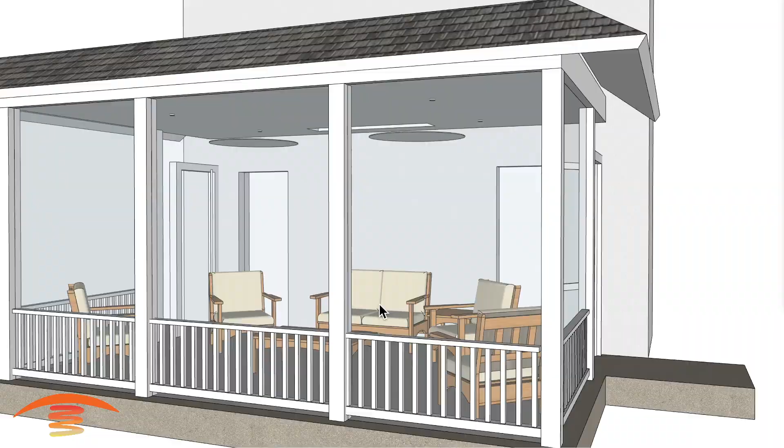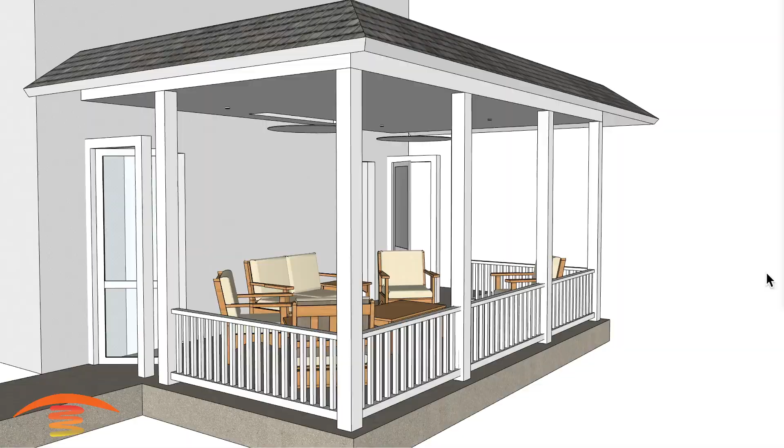All right, so we had a viewer ask a question in reference to flush mounting a unit over here and what the outcome would be for, I think, basically the sitting position right here. There are vinyl windows on the outer edge of this structural patio, and also screened sections as well. I didn't put all of that detail in. In fact, I'm going to take out the vinyl windows here. I'm just going to remove that so we can maneuver through the patio here a little bit easier.

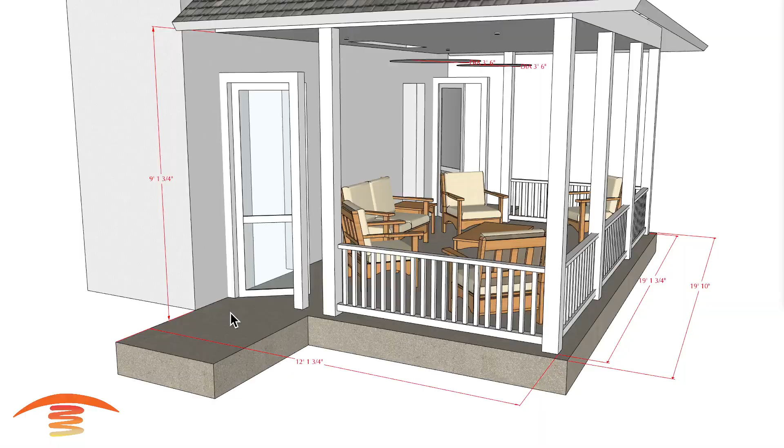First of all, let's go into the dimensions that I have. So dimensions are not 100% accurate here, but they're very close. I would say 19 foot 1.75 inch that I have there, and then from the wall over here to the outer edge here, I have that at 12 foot 1 3/4. I have a ceiling height of roughly about 9 feet off the finished floor.

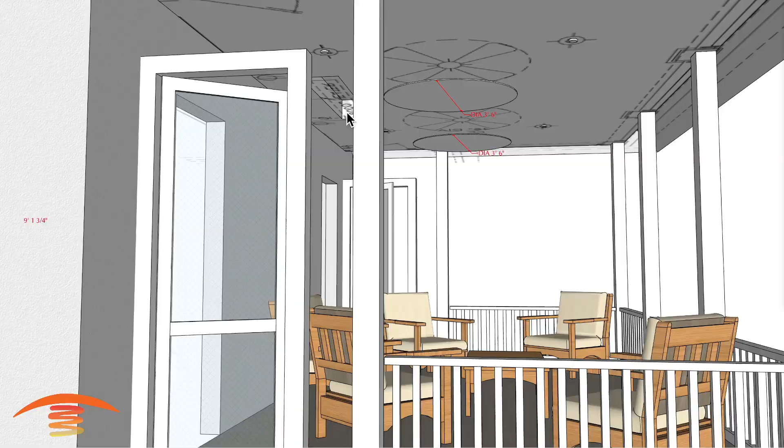There are 2 fans, and I've located those fans based on the ceiling drawing that I received, just so you can see that. I placed the light structures here as well as where they're asking about the flush mounted unit as well. And there's a different question too in reference to a wall mounted unit here and how that would affect the seating position over here. Let's see if there's anything else. Oh, the fan dimensions I have is 3 feet 6 inches, or 42 inches.

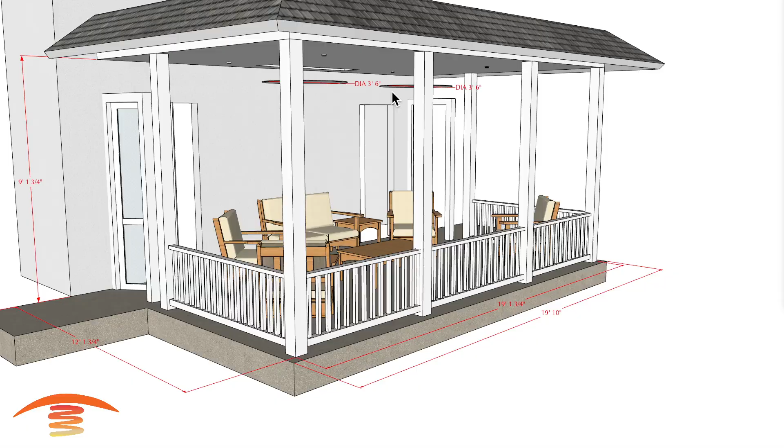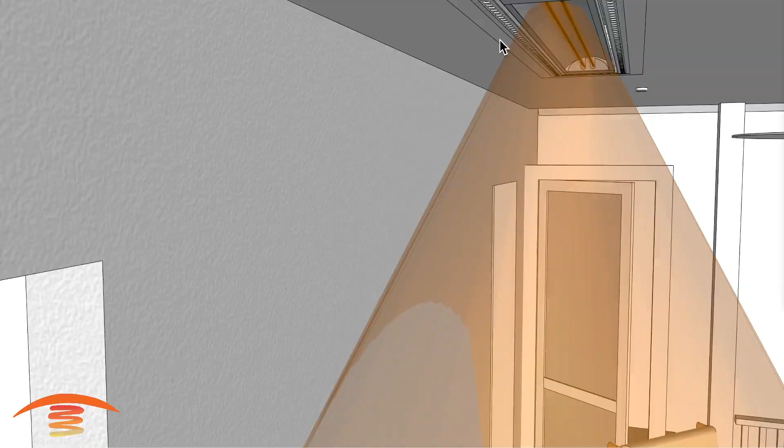Let's go ahead and shut that off and look first of all at the flush mount unit. So I'm going to put that on. So this is a 6,000 watt flush mounted unit, and we want to make sure that we are meeting the clearances to anything below the heater itself. So here's the clearance, 18 inches from the edge of the heater. So this is the heater itself right here. This is the flush mount kit. The edge of the heater, 18 inches to the edge.

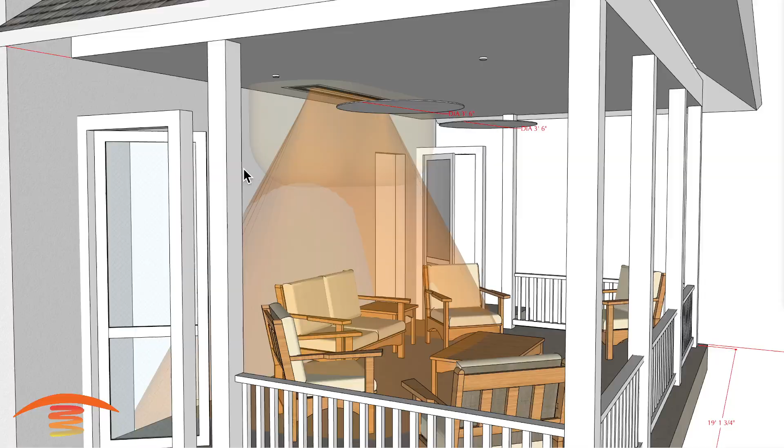Now I put this as a stucco wall. I'm not 100% certain, but just in case you're thinking, well, stucco isn't combustible. Well, the structural part of the wall behind the stucco is still considered combustible if it's a wooden structure. So even though some people think that stucco is not combustible, it is in fact combustible. So you need to make sure that you are meeting those clearances. I put that off here. Let's see. There we go.

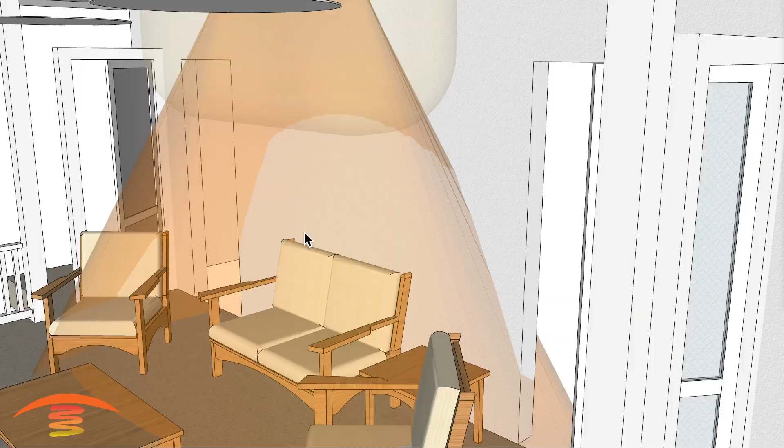So anyways, this is a 6,000 watt unit, and the intensity for this position here is very good at 9 feet off the finished floor. And I would definitely want to have a control system for something like this, because there's 3 ways that you can turn this heater on and off. Number 1 would be a simple switch to turn it on and off.

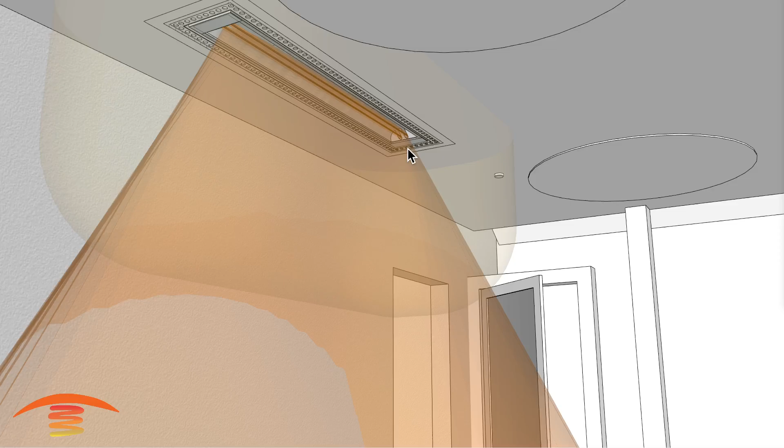The second one would be what they call a duplex switch, which would allow you to turn one element on, one element off. And then the third would be to use a control panel, and that would allow for dimming the system so that you could actually turn it from 10% on all the way to 100% on, depending on how you want that heat at that particular moment.

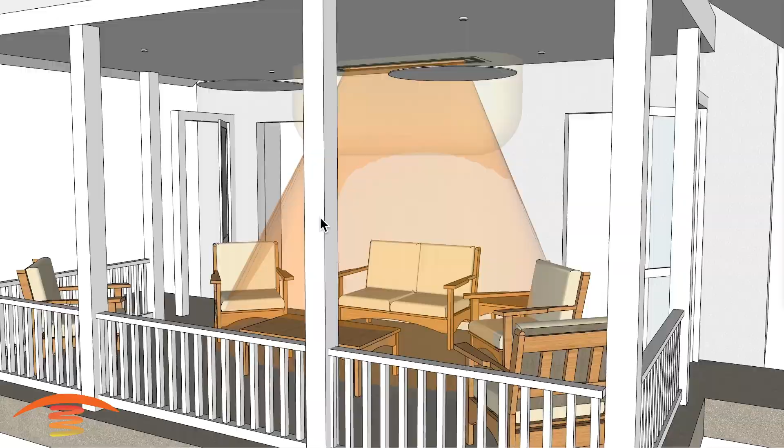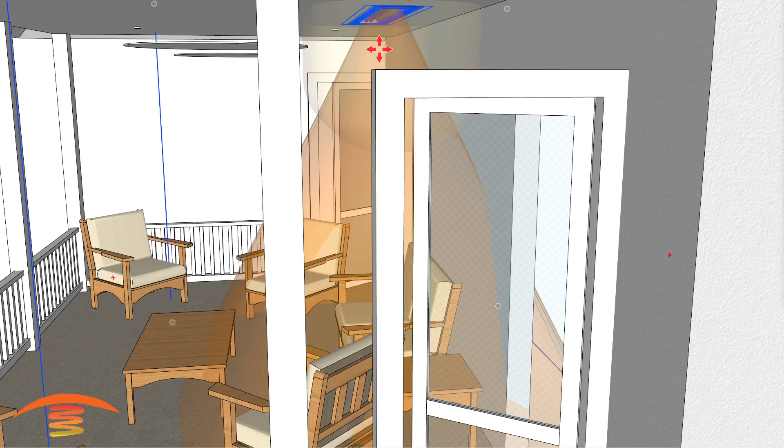The other thing I was going to mention is you can see how the ray here is penetrating the wall fairly abruptly, and a lot of the ray is being penetrated in here. It would be a little bit nicer to be able to move the heater over to the outer edge of the patio. So if we were to move it, let's say, maybe 24 inches out, obviously we have an issue now with the fan dimensions here, but could we move those fans to eliminate some of that issue?

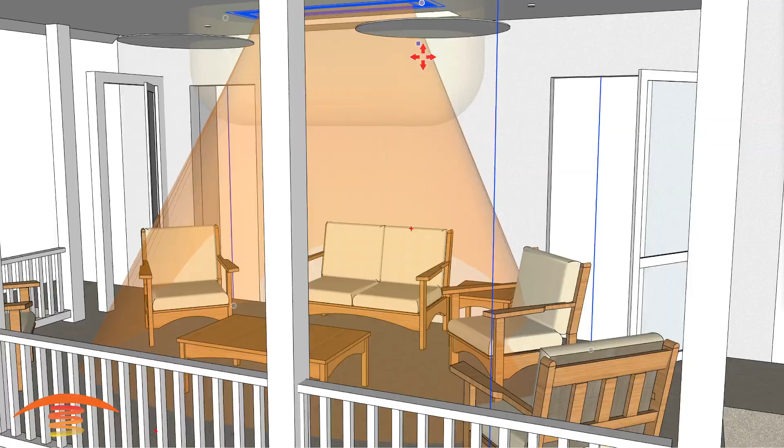What I have here is, I believe, and I'm not 100% sure, of the drawing. I'm going to put on some of the elevations that I received here so you can see. I've matched this up fairly decently. And so I think that the fans could be pressed out and the lights could be pushed out to the left a little bit in order to achieve some of that.

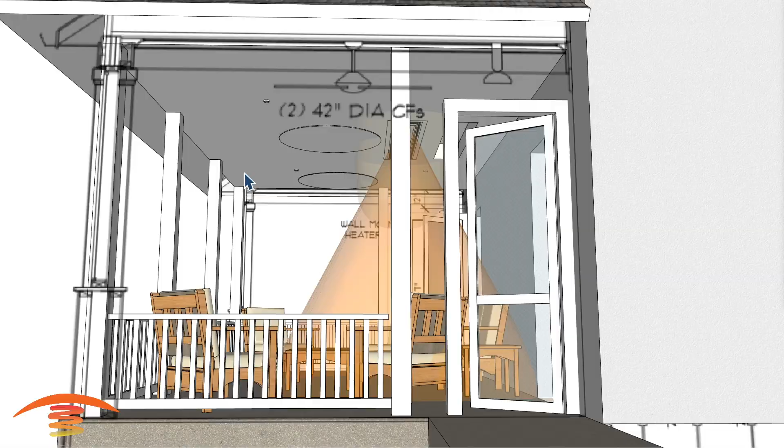So let's go ahead and just move the fans here. I'm going to move them roughly 12 inches out and see what happens here. So that's 12 inches out, and visually it still looks like it's partially centered within that span. And I'm going to go ahead and turn off the elevations here that I received so we can maneuver things a little bit easier. So that's 12 inches out.

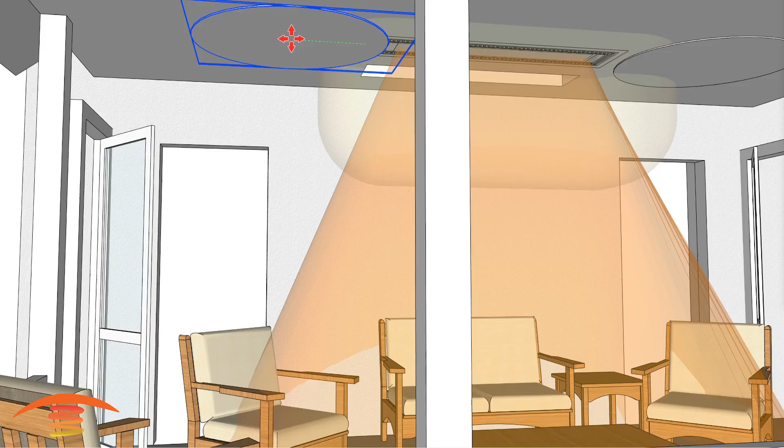And then if I was to move each fan over to the left and right, how far could I actually achieve that? So that is 1 foot 4 inches. So we'll go 16 inches over here, and let's see if we're even outside of that. Yeah, that clearance area is good now, and so we'll move this one over here at that same distance, 16 inches to the right.

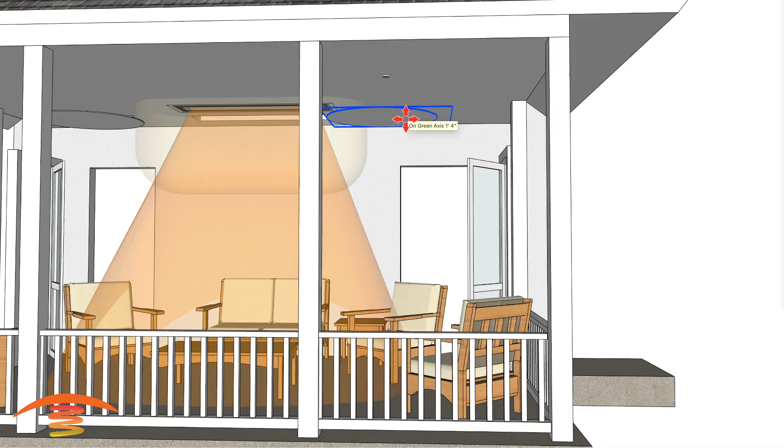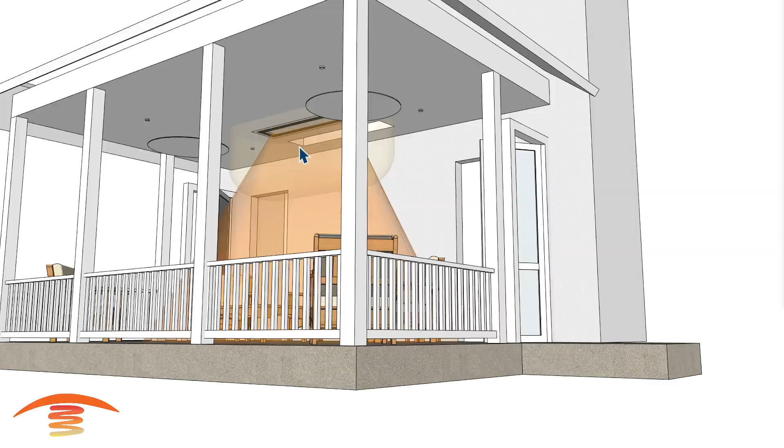And there is another thing that we need to kind of be concerned about, and that is the doorways here. Is that going to affect hitting the fan, or is that going to affect hitting the clearance area? But as you can see here, we're fine with that. That would be something I would consider, and obviously we'd want to move the light fixtures as well out to the left. But that, in my opinion, would be fairly decent if that could be done.

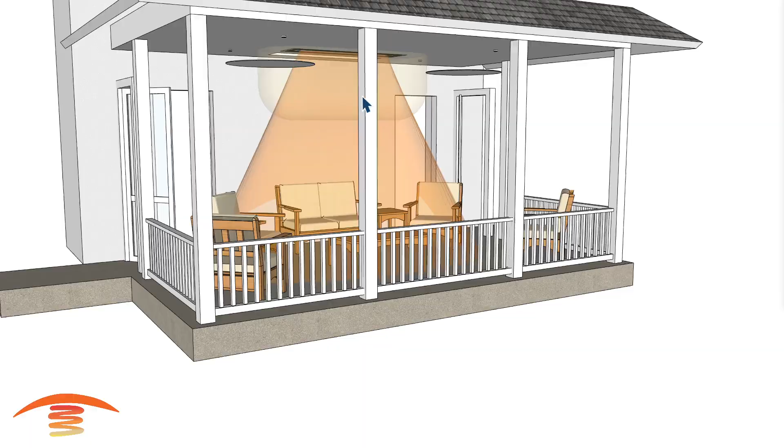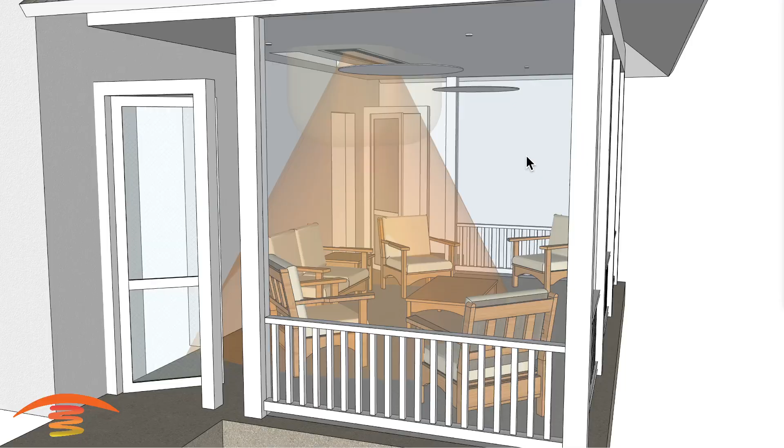Another thing I should mention too is the fact that with the vinyl siding and the screened in sections that I don't have on here, the air movement is really reduced with those elements. So cold air blowing through a patio structure isn't going to be that effective with a protected patio like this. So the intensity doesn't need to be as high because it's more of an

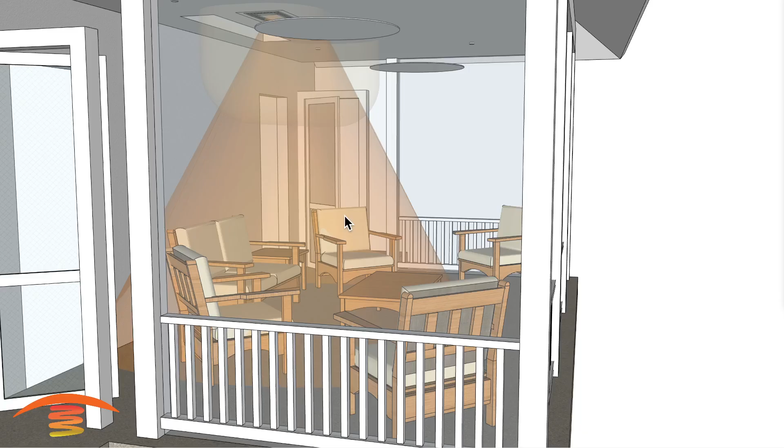enclosed space, and with enclosed spaces what happens is the heat ray itself, this is infrared light waves, penetrates all mass: the floor, tables, chairs, your human body, and those masses will then produce a convection type of heat into the area, and that convection heat, meaning that you're heating the air eventually, will stay in a protected area. So the intensity isn't as dramatic or highly required for an enclosed space.

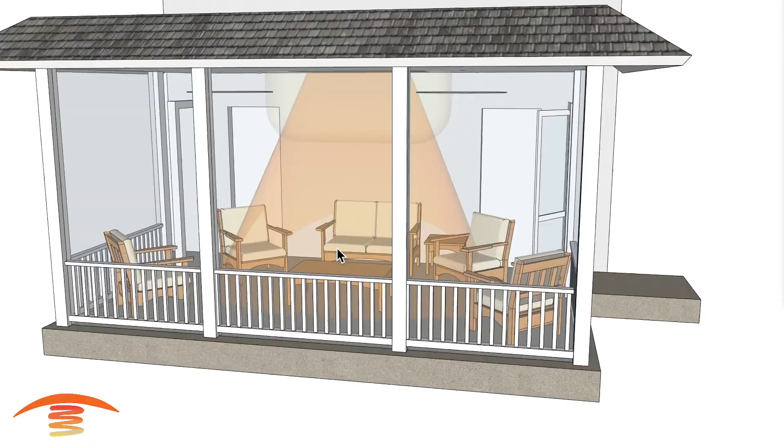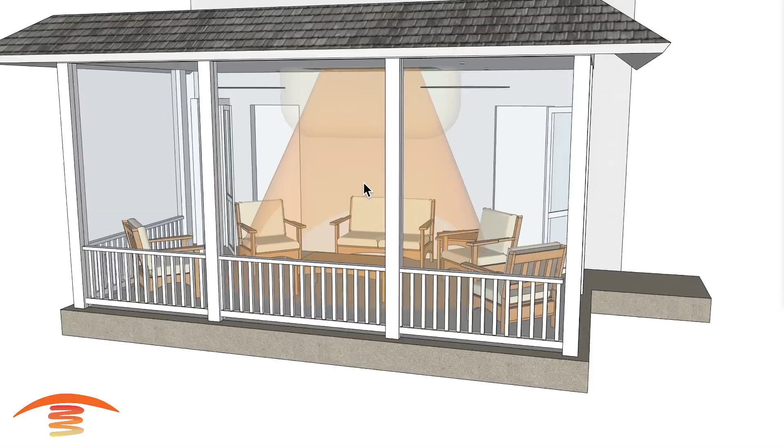Although, indoors here, it is obviously going to be just as cold as the air outside until you put the heater on and 15, 20 minutes, an hour goes by. That intensity or air temperature inside of an enclosed space will build up. So just to note that the intensity isn't as critical as if it was an open space like this where the air movement is constantly going through.

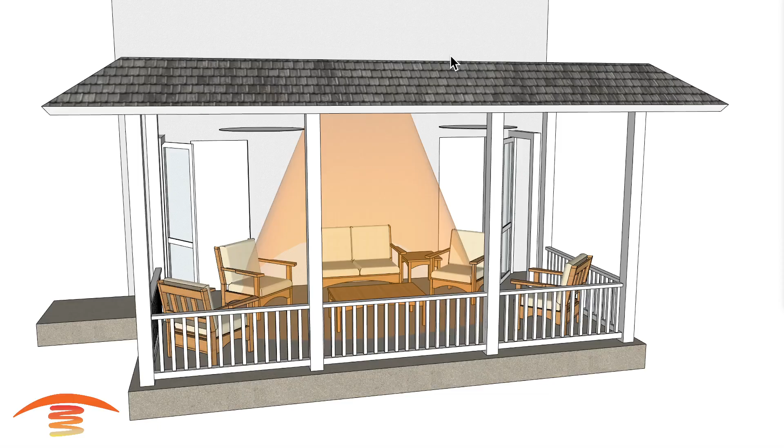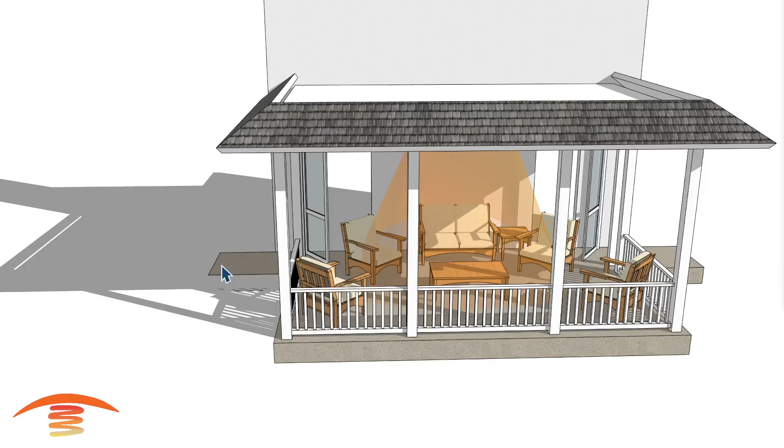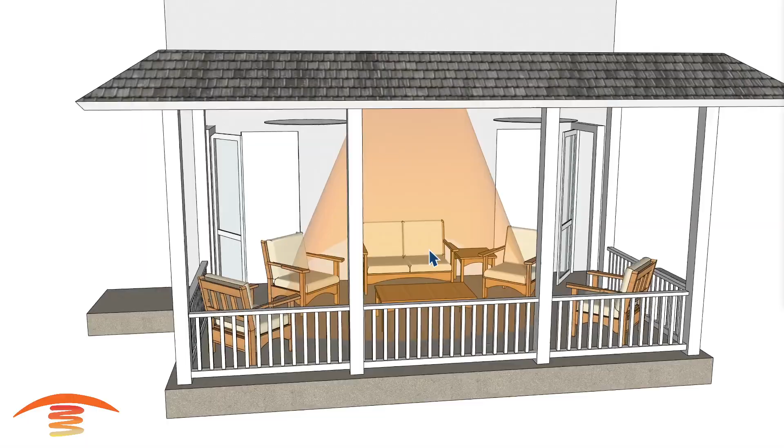If you're in that light wave itself, then you will feel the warmth of the heater and feel warmer than you do without that heater on, just like being in the sunlight. Let's see if there's anything else I wanted to bring up.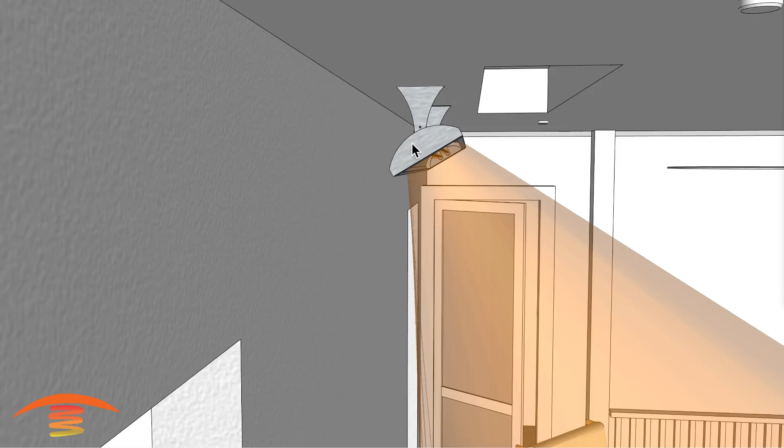Let's go ahead and turn that off and then look at the other question that they had, which was a wall mounted unit on the wall back here. So this is a CD 6024, a 6000 watt 240 volt. Now you might notice that I've attached this to the ceiling, not to the wall. And I'm going to actually just bring this back so we don't see this at this moment.

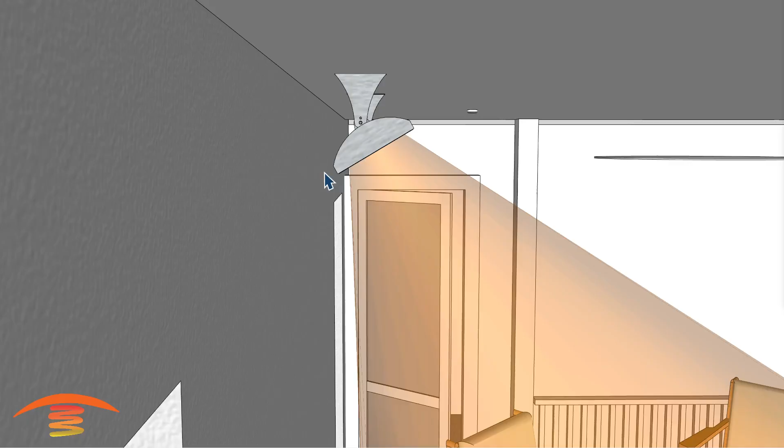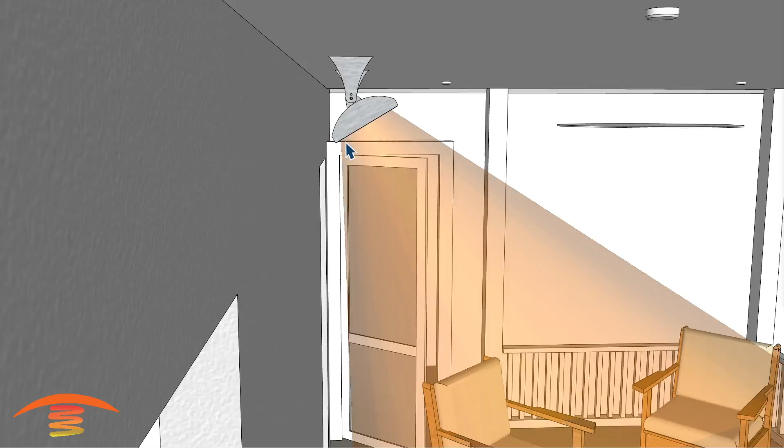But I made sure that we are 6 inches away from the edge of the wall here, and that we are only at a 30-degree tilt, so straight down 30 degrees out. The reason why is because if you put it on a vertical surface or wall, something of that nature, and you have it at 30 degrees, you must lower the unit an additional 6 inches. But with a ceiling wall mounted unit, you're allowed to place it at 30 degrees, mounted on the ceiling.

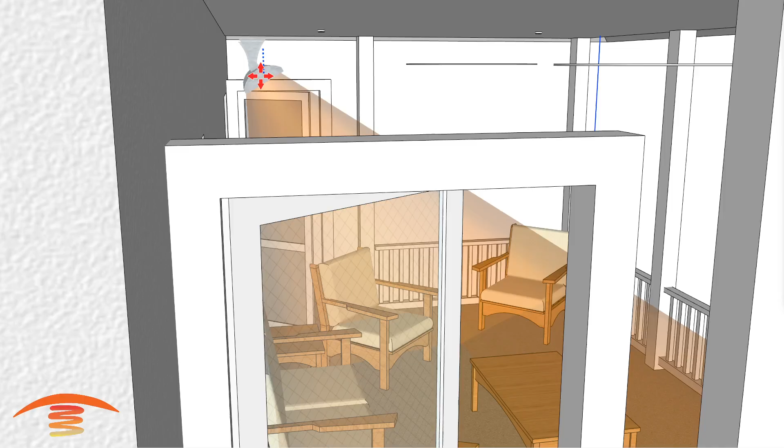You know, it's going to be essentially in the same area, or visually looking like it's in the same area, but obviously if you mount it on the wall, that's going to be an additional 6 inches down. So this is kind of what I would prefer if you're going to do something like this, is to place it on the ceiling 30 degrees out. And yeah, I think this would be much nicer.

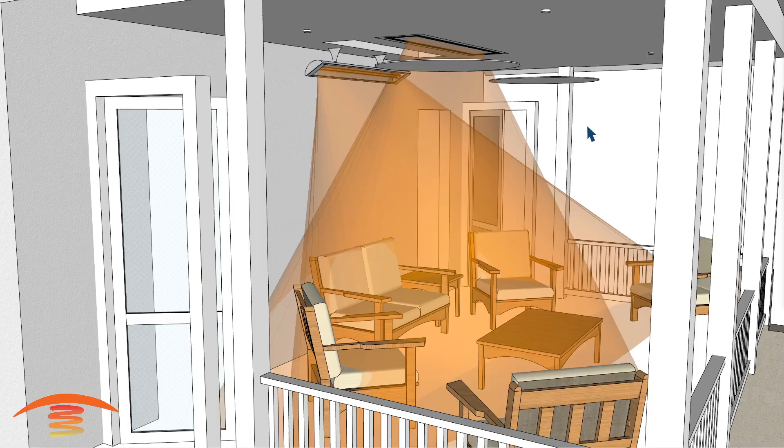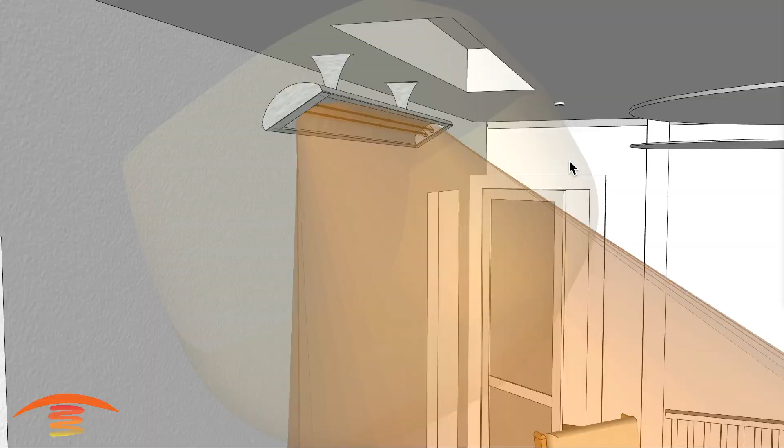Now let's see if I can go back here real quick. I'm going to do a lot of reverse stuff here so that we can get these heaters back into the location. I'm going to turn this one off here so we don't look at all that flashing. But let's see if we have that back right. Yeah, I think we do. And let me go ahead and turn that one back on now so we can get a better idea of the clearances here, which are fine with that ceiling mount like this. And yeah, I think this would be decent as well.

It would definitely heat up this space right here, give you a little bit more areas of coverage on the left and right. It would not reach out here or out here. So what would I do in order to make that a little bit more coverage, is I'd place maybe a couple other units over here. This is a 5200 watt unit here. It's only 48 inches long, the heater itself.

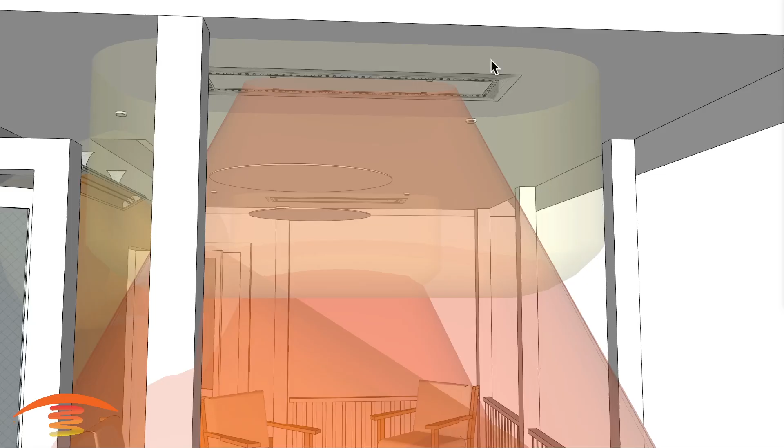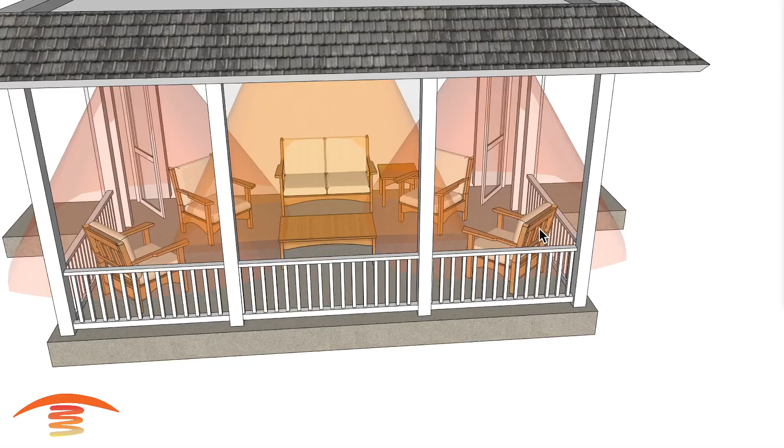Now I didn't do the recessing of the heater, or ceiling I should say. And let's turn off that clearance below here. But you can see now that we are heating up the entire space as far as the area that's going to be occupied. So that's just another thought that I wanted to bring up.

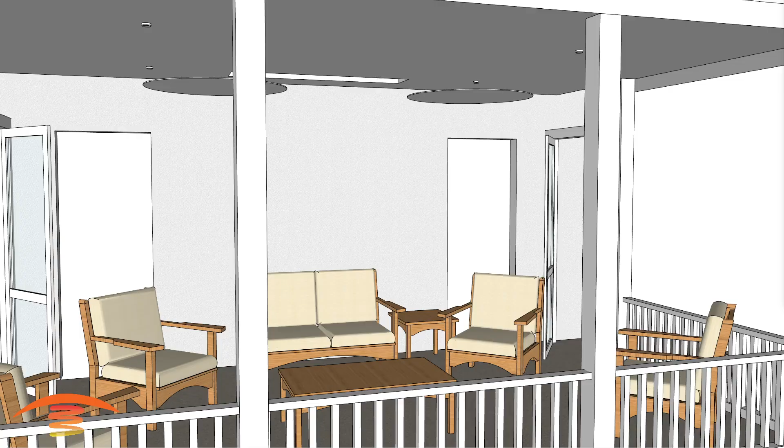And then one last thing I'm going to go through. This is going to be a little bit of extra time here, but putting a recessed heater in here, let's turn this one off and go back to the flush mounted unit, and I'm going to move this back here. I think we had it 24 inches, yeah. And I'm going to actually take off the ceiling for a minute.

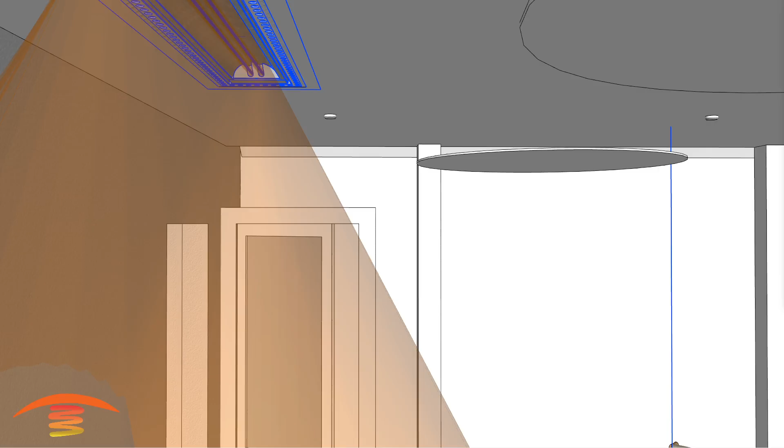And sorry for the delay here. Oh, here we go. Sorry about that.

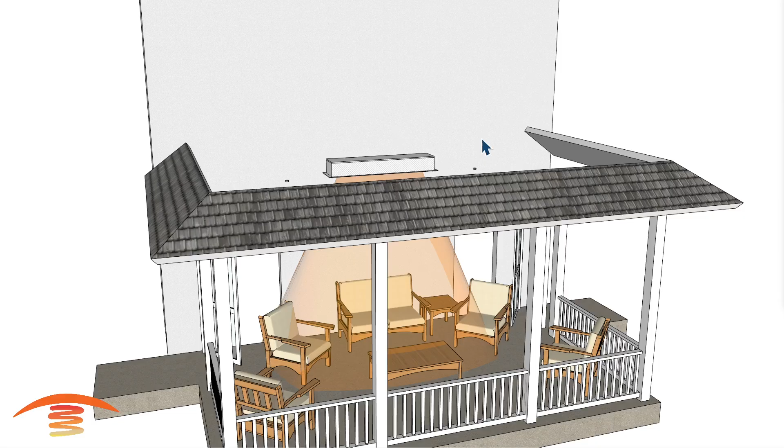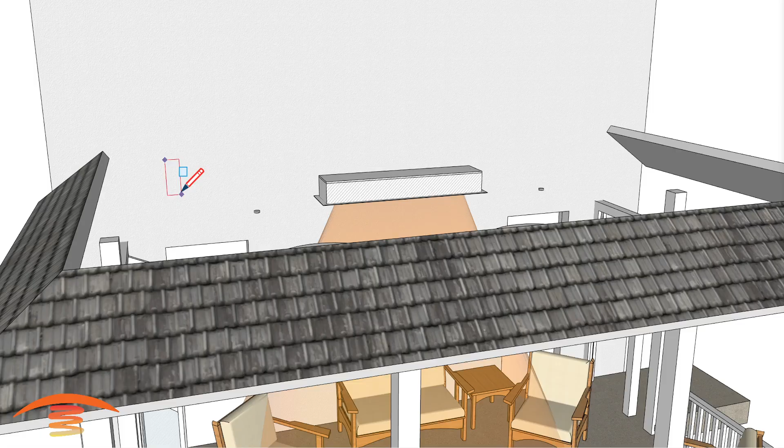So generally, when I look at drawings for this top section here, it's an patio structure up above the patio area below, so a balcony deck type of structure. And generally what I see, and I don't know if this is going to be the true case, is something like this, where, let's get in here and let's go with, whoops. You'll generally have some joists that come across, and they generally come in dimensions similar to this here.

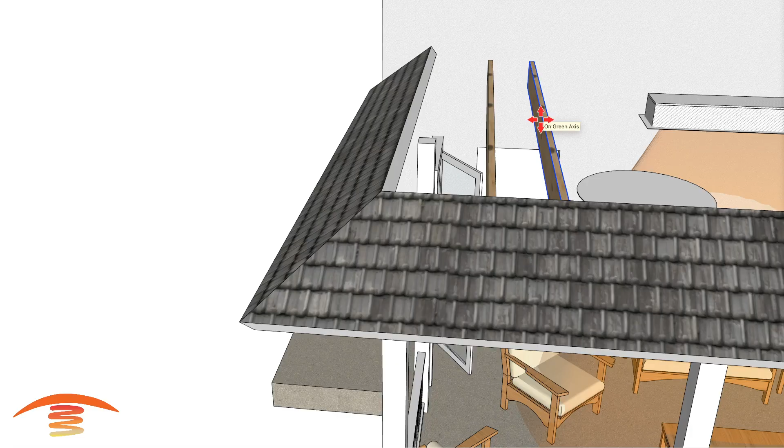And I'm not a structural engineer, but generally what I see is that, whoops, sorry about that. This is how this is arranged generally, and usually about 16 inches in distance apart from each other. And let's just go with a few of these, and you can see that I don't have them in the right elevation as far as what it would really be. But obviously now we have this issue with that structural part of the patio itself.

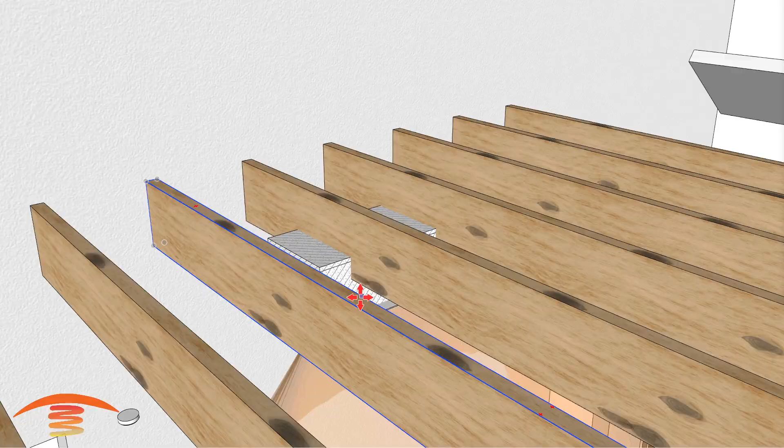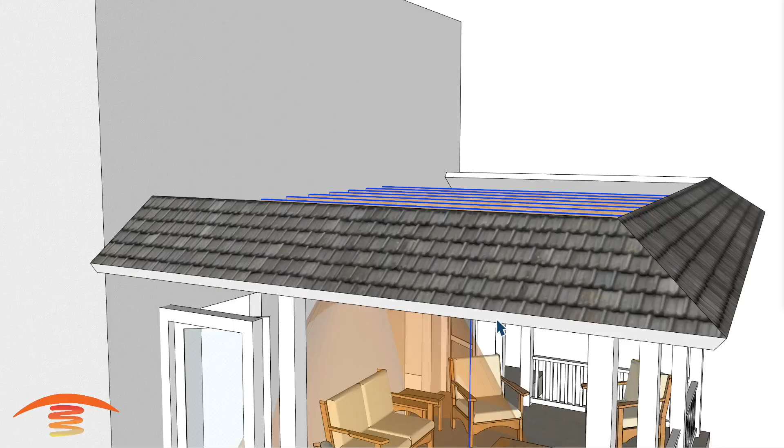I have this at 10 inches tall right now, might be 12 inches tall, and if I was to actually put these all in the same elevation, and let's see if I can take that one off. I grabbed this by accident. Let's take these off here, and we're going to go ahead and move these down to the same elevation as, there we go, as the flush mount itself.

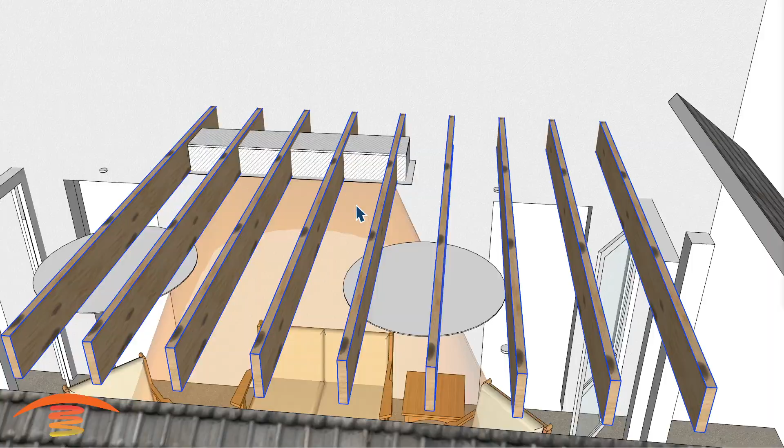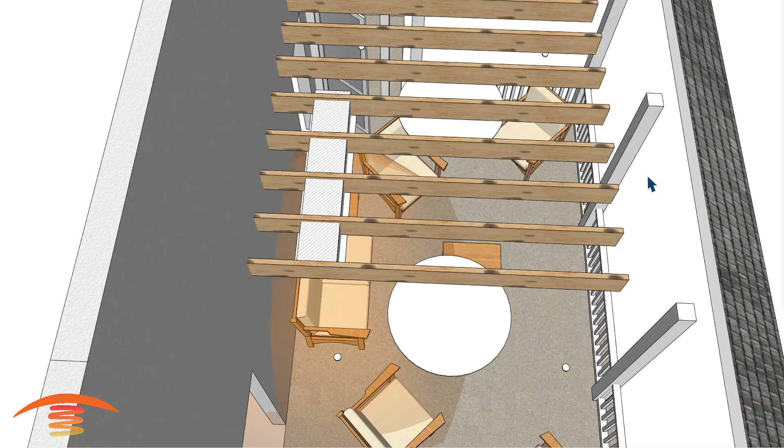So obviously you would have to adjust this somehow structurally, because you would have to make an opening here for these particular units here. Let me just go ahead and show kind of what I'm talking about, and let's see if we can. So what I'm going to do here is make this so that we open this all up.

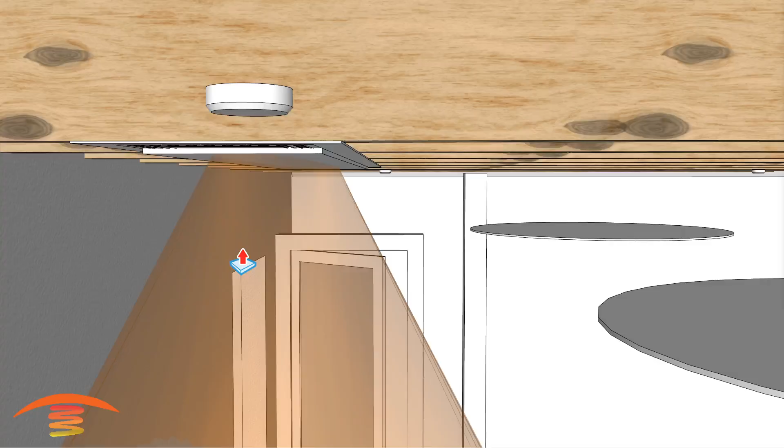And I'm going to go ahead now and turn this off. And sorry for the delay again. This is just going to take a little bit of extra time here to go through this portion of it. But in any case, again, I am not a designer or structural engineer, but all of these cross members or beams up here are going to be an issue with regards to the structural portion of it.

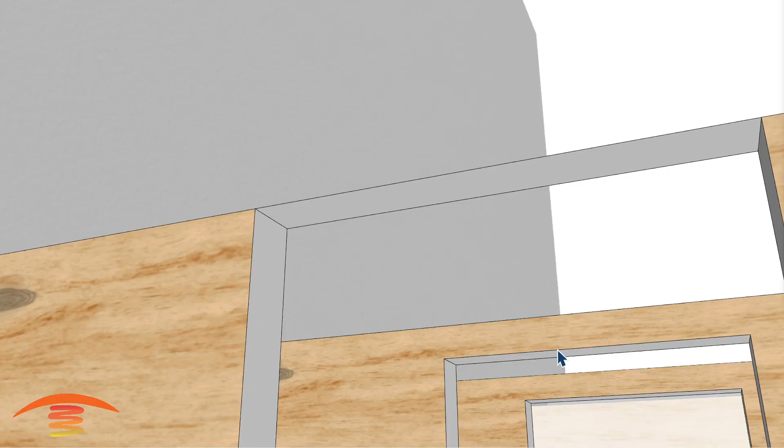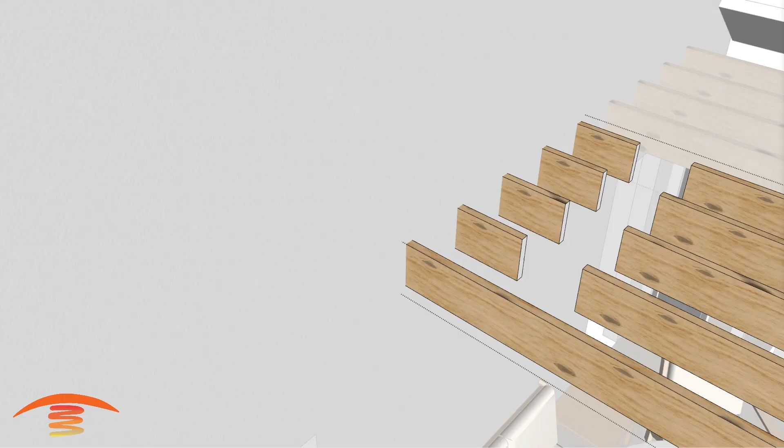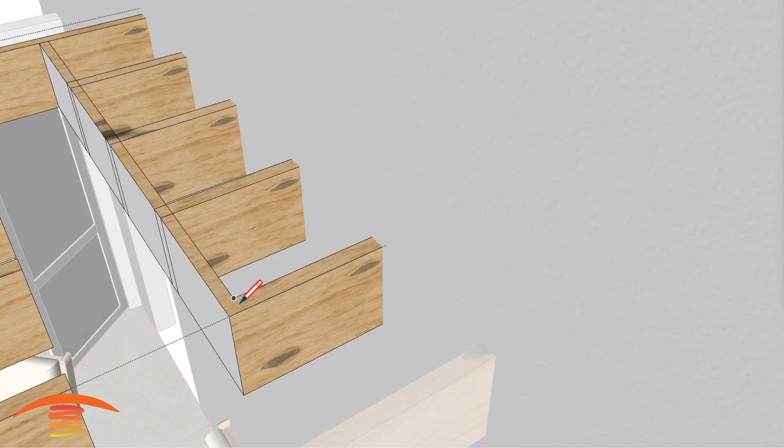So let's see here, and yeah, there's no structural integrity that I see, and again, I'm not 100% structurally engineered, but you would have to do something like this, and this is all going to be just very quickly. We'll go across. So this would have to be a cross member here, and it would have to look something like this here.

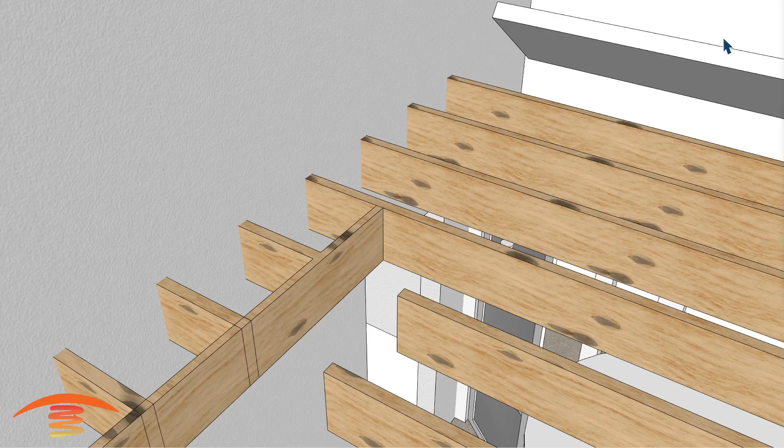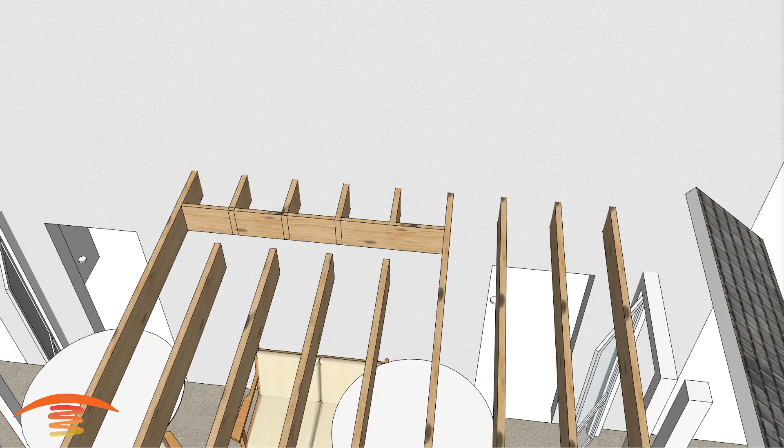And that would have to be on both sides, and that structural integrity would have to be designed so that it can handle the weight of the upper deck patio area. So that is one consideration that I would take into mind before you make this ultimate decision of putting a flush mount unit in here. So let's go ahead and turn that back on, and obviously you'd have to put another beam across here, or it would have to be a structural design.

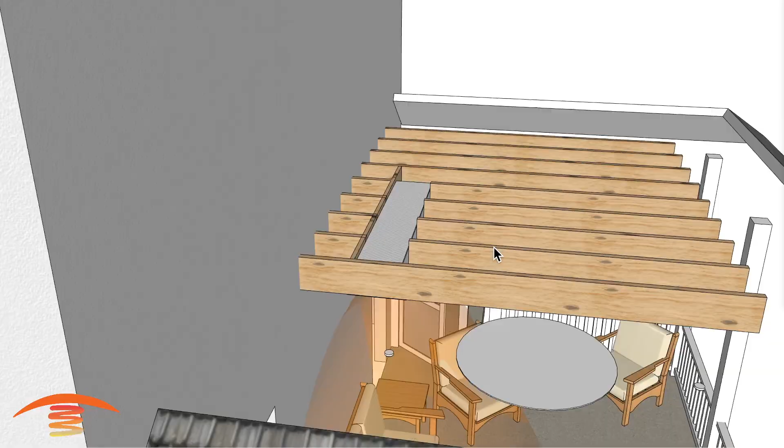Like I said, this is not a structural design that I'm showing. This is just something that I've seen for some patio structures. Now, that doesn't mean that it's a deck patio structure, but it's just things that I have seen in the past. So that's one thing that you might want to consider.

And I'm going to go ahead and just take that all off there and go back to the original, which was to just have the same patio structure that I had before. And let's put that top back on, and that's what it would look like going that 18 inches originally. And I moved all these back.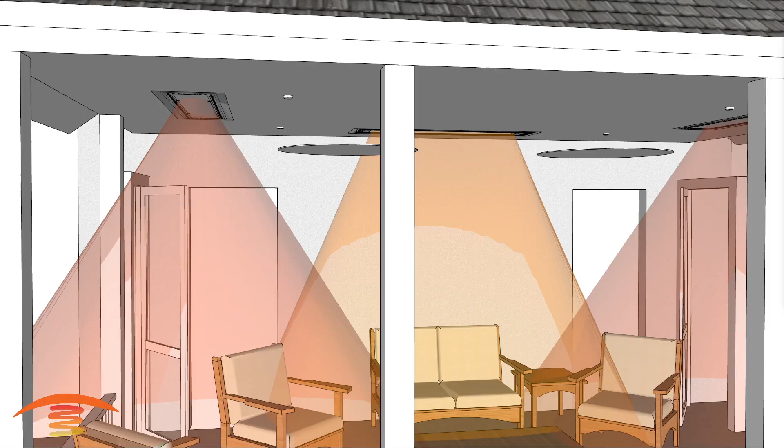So the other thing I should say is placing the other units here, moving the heaters or the fans back. There's still those clearance issues that we're looking at, and those clearance issues below, first of all, it's 18 inches out here and then 18 inches here. So that's something that also needs to be considered if you were going to add additional units.

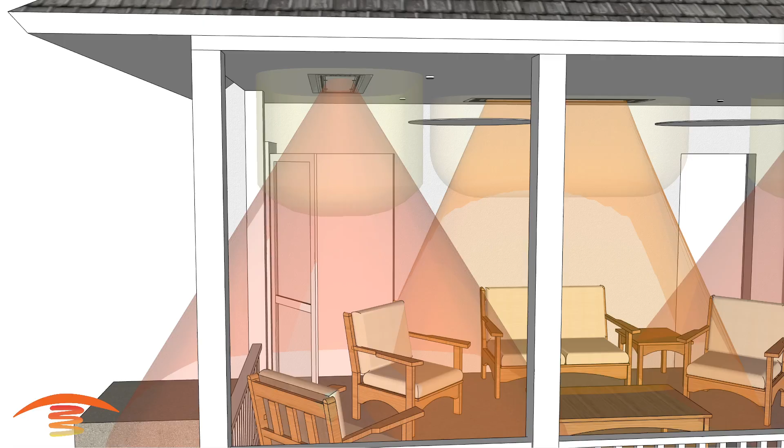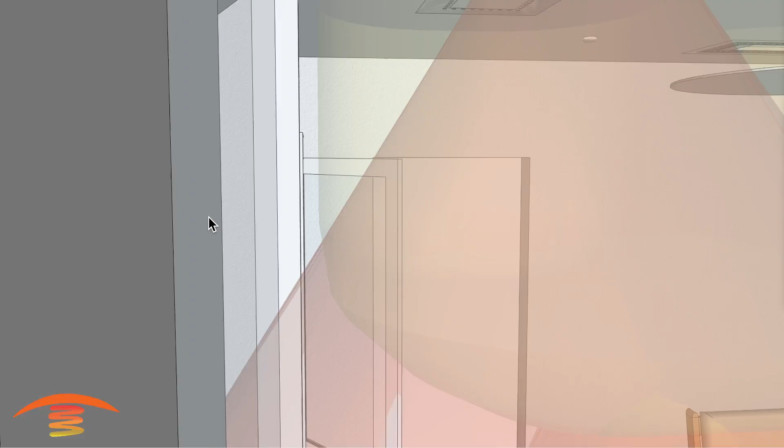Now, what about the heat ray penetrating the vinyl siding here? Obviously that vinyl siding now is being penetrated by heat ray roughly about, let's see if I can get in here closer, and I'm going to try this. Let's see if this works, and it doesn't. Let's see, one more thing, try it again. So this is some of the geometry of the flush mount itself and the ray itself, and let's see how that penetration looks with regards to where it's actually hitting.

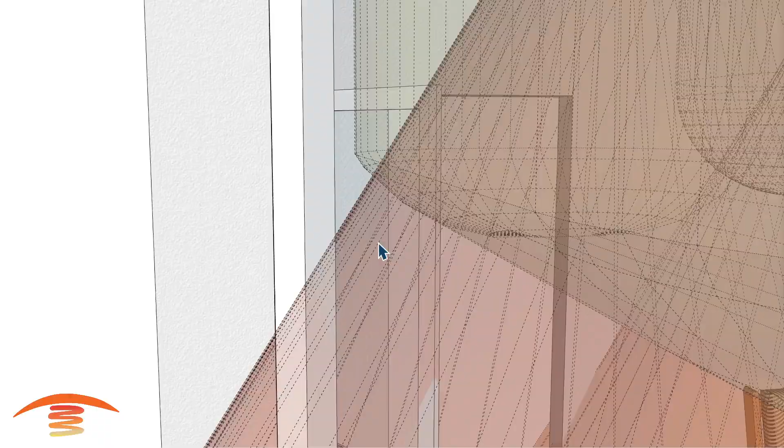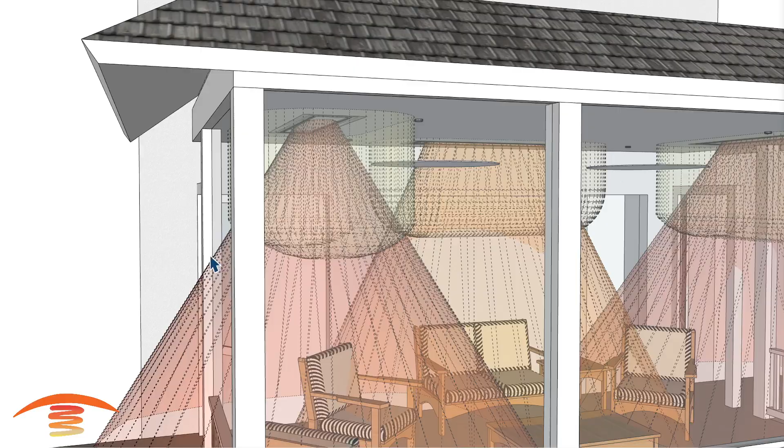I can see a small line here, it's hard to see, but in any case that would be something that would also have to be a concern. I'm not sure of what that vinyl siding could actually handle. We are meeting the clearances to combustibles, but that vinyl siding might have an issue where it starts to warp and not function very long. So that's just something else that you should consider if you were going to do something like this.

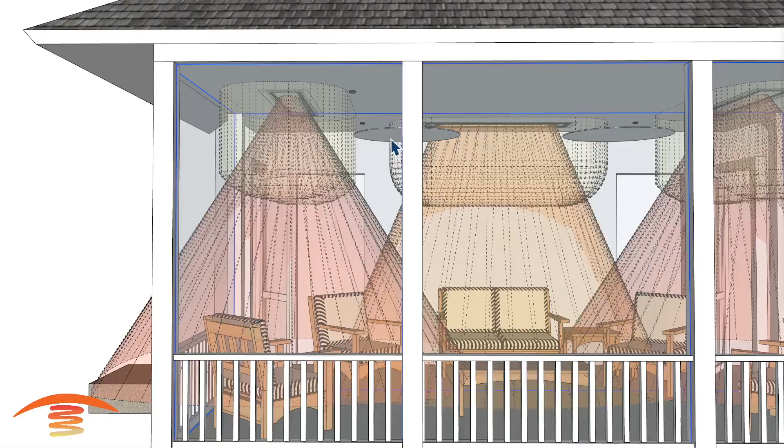So moving the fans in again would be something that I would consider, so that you can actually move the heater itself in. Let me take this vinyl siding off and move this, that's looking more efficient as far as the intensity hitting the vinyl. So that's about 10 inches in. So you'd have to move these fans 10 inches in as well for something like this. And that would probably be kind of close for those fans, but something to consider if you were going to think about doing something like this as well.

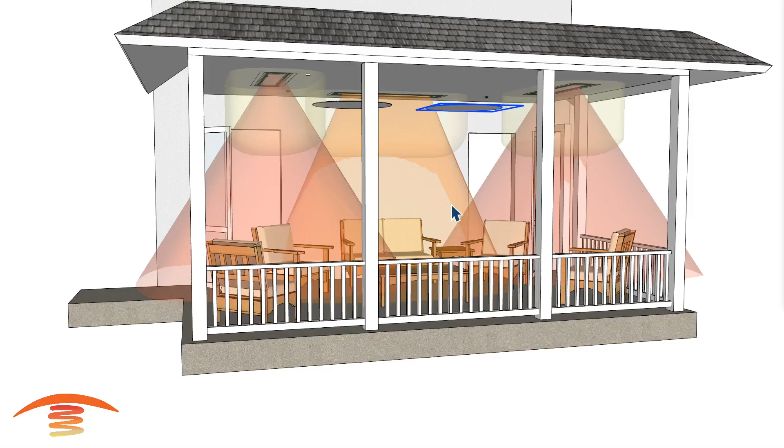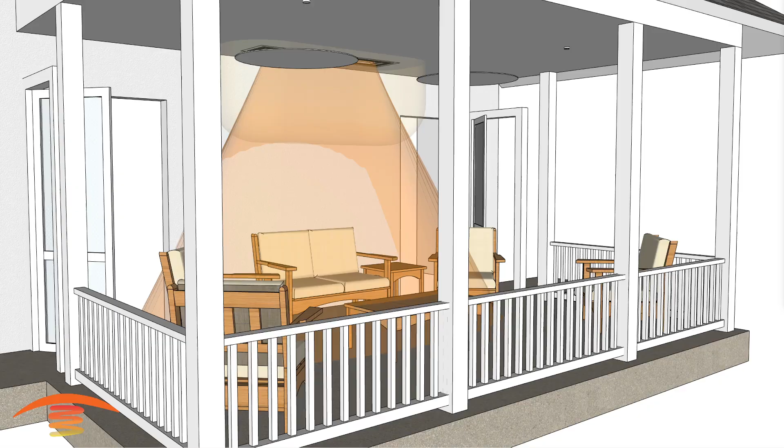So let me take that off there and go back to what we had before, and we'll remove this. And so yeah, this would probably be my preferred if this is the only seating position that you really wanted to heat. And then the second one would actually be the ceiling mount like I showed before, having it mounted over here, something like this. Yeah, that's about it. All right, well, I hope this has helped.